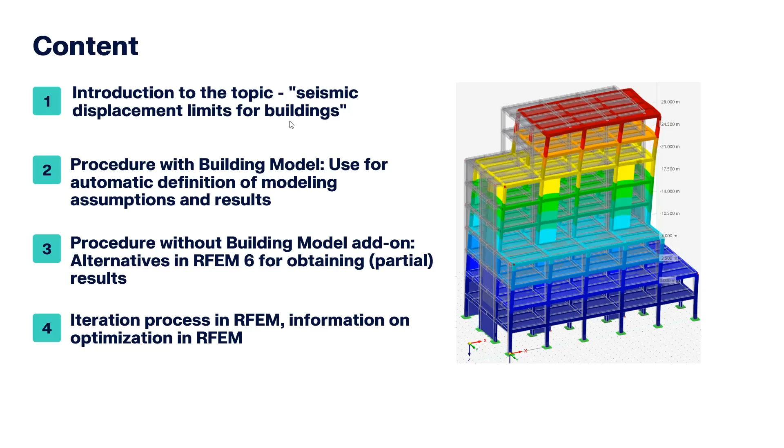Let's get started with the first topic, the introduction to seismic displacement limits for buildings. The reference for today will be Eurocode 8, design of structures for earthquake resistance. This reference applies for the whole of Europe, though in countries like Germany with small seismicity it may not be as relevant. We will make an exercise or example in which the seismic displacement is the controlling action, the seismic action.

I want to remark that I'm going to present several sections from Eurocode 8, but not all the requirements are exactly what I show here. This summary can be understood as a good pre-dimensioning tool, or a first iteration procedure, but further requirements and sections have to be complied with according to Eurocode 8. It is recommended that a full review of the norm be taken into account. As I said, this is maybe the first step for these checks.

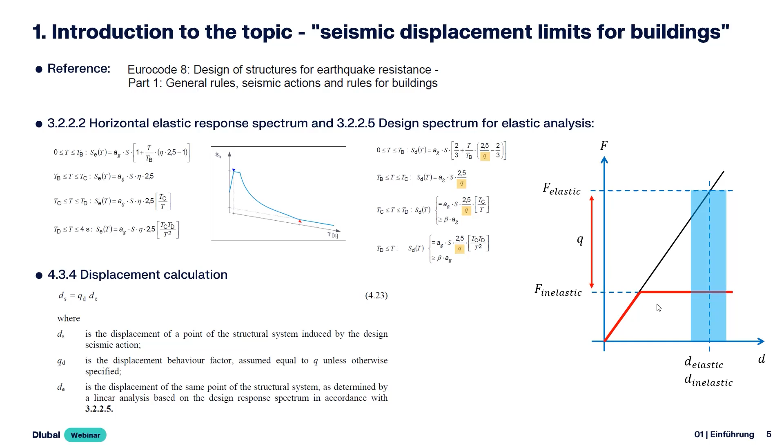Okay, now I jump to the third section here: the limits of the so-called interstory drift. So in the first place, here's a picture about what's the interstory drift. It's the relative displacement between the top of the story and the bottom of the story. So we have to control this measure of displacement in each story, and not necessarily overall in the structure.

Okay, so we have three limits, and these limits are for dimensioning and design of structural elements, but the description or classification of these three limits depends on the description of the non-structural elements. So it's very important to take into account from the beginning, in the prefeasibility or other early stages of design, it's quite important to define the description of the non-structural elements.

So if we have brittle materials, we have a certain limit, and the description of ductile non-structural elements might be really important for the construction site. Maybe the costs of these non-structural elements according to B or C might be too high, and we have to switch to approach A.

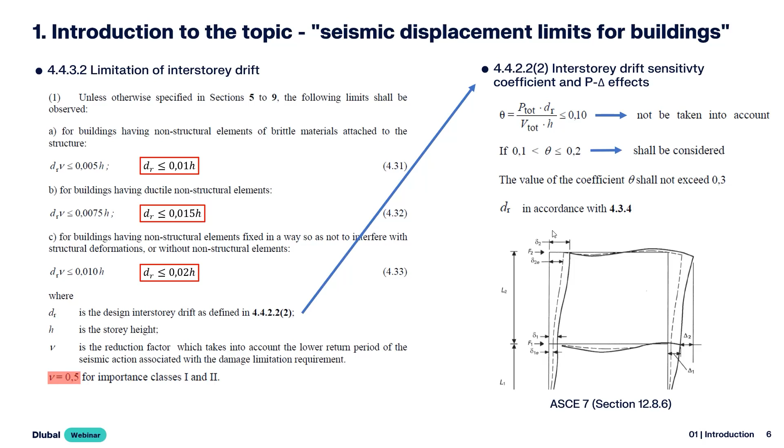So, okay, let's start on the second chapter of today: the procedure with the building model. So I have 4 steps and then a couple of sub-steps. I'm going to once again present here several sections from the norm, and after that I'm going to jump into the model.

Yeah, so let's check out two sections, two important sections. The first one, the first step, model analysis. So based on an available model, we will define a modal analysis, and after that a response spectrum analysis. But for this, we want to take into account the stiffness according to 4.3.1 and then subsection 7.

And that's why I started with this figure in the introduction. This section recommends that the stiffness when the cracking takes place should be taken into account, and this cracking takes place in the inelastic response. So if we say at the red line, it's going to be the actual response of the building. At this point we expect some reduction in stiffness, and the recommended value is half of the corresponding stiffness of the uncracked element, for both shear and flexural stiffness.

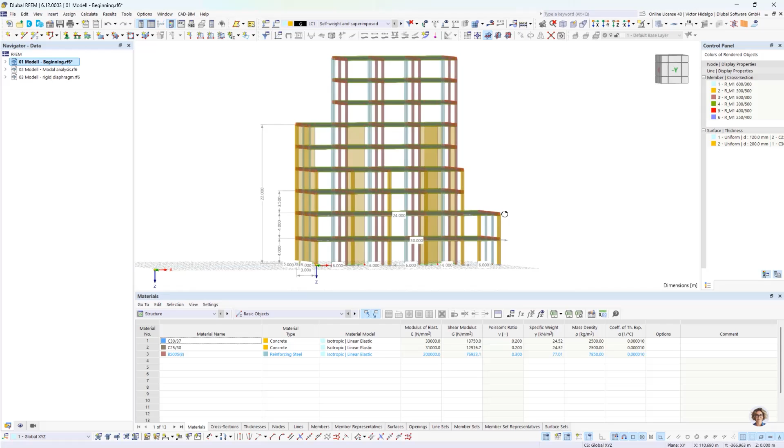I'm gonna show a very simple example in the program, and let's take a look at these two sections in the program. So I'm gonna start with a description of the building. We have a very irregular building here, with jumps in the geometry of the stories, and I did this on purpose to illustrate the concept of irregularities.

Just as a quick description, we have here a reinforced concrete building with walls, one can say very stiff walls. I'm gonna show them here with visibilities. In the navigator views, we have some predefined visibilities which help us with the inspection of the model or visualization.

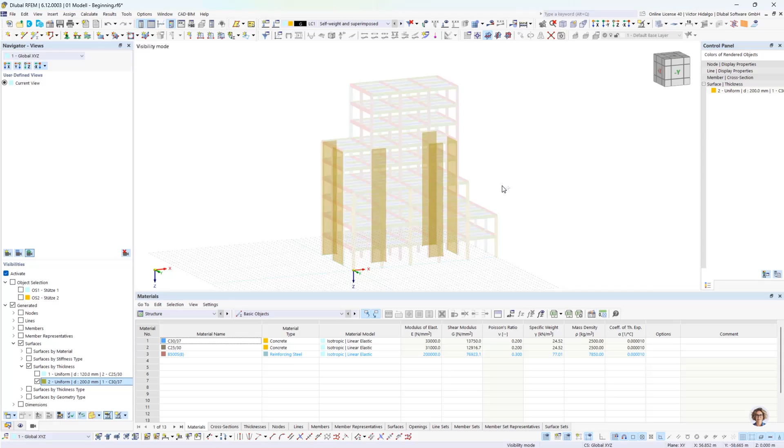So we can see here 6 walls which are conceived to limit the lateral displacement of the structure, so exactly this interstory drift.

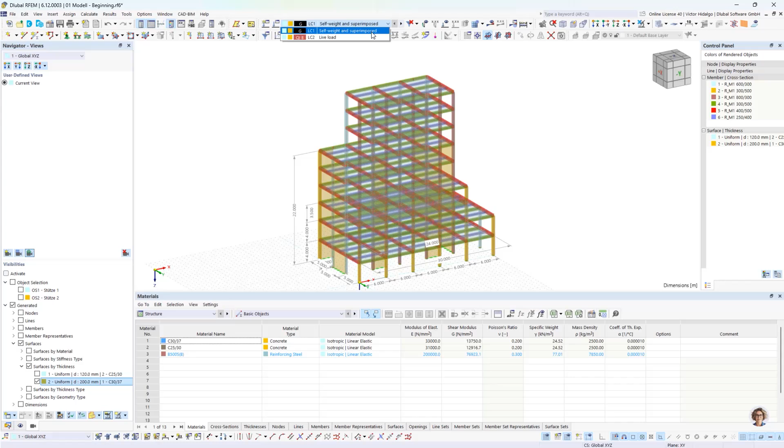Okay, I'm gonna cancel the visibility, come back to the original view, and show the loads definition. So I have 2 load cases: self-weight and superimposed live load. In this case, I have a very general definition, quite simple for today's exercise.

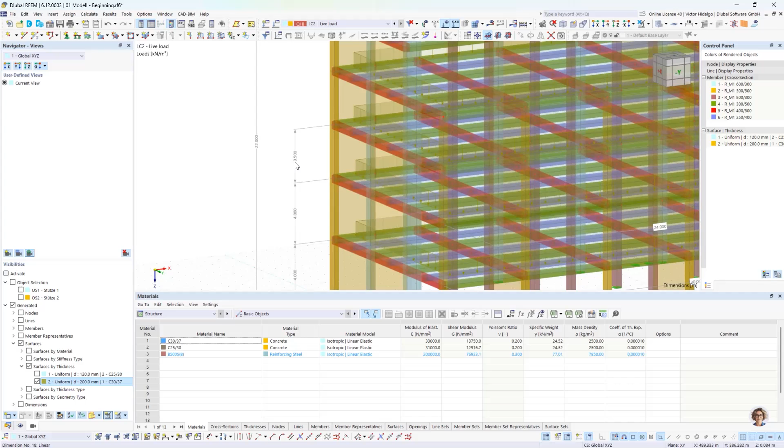Yeah, of course, so that's our base model. Also, just to say, the first 2 stories have a height of 4 meters, and after that we have 3.5. So this is gonna be important when activating the building model.

Okay, so we have this general overview, and now we want to define our modal analysis. For this, we will go to the button Edit Model Base Data, and here we can activate the desired type of analysis. In our case today, dynamic analysis. If I click on response spectrum analysis, modal analysis will be automatically activated.

And according to what I want to calculate, I can select other add-ons. In this case, it's just of interest, this dynamic analysis. Take into account that when we activate something here, we might need to provide a norm or design standard for the corresponding new feature in the program. So in this case, I'm gonna leave Eurocode.

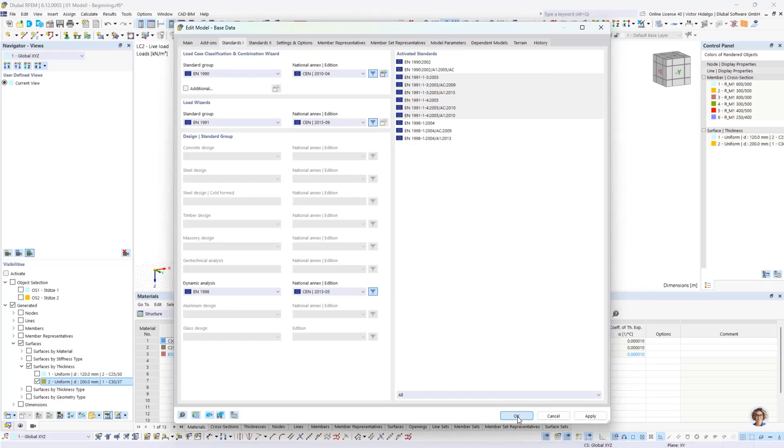Now I can go to edit active load case. In this menu, I can create a new load case of type modal analysis. So I'm gonna call it modal analysis 1, and this is gonna be basis 1.

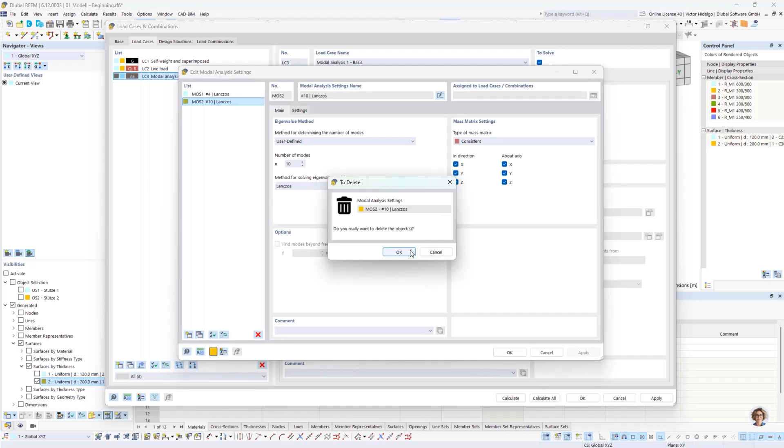I'm gonna edit the settings. I erase the second, and I'm gonna make here a typical definition for modal analysis to reach effective modal mass factors, typical value of 90%. And then we are limited to this method for solving.

On the mass matrix settings, I'm gonna choose diagonal on a classical building analysis with the 2 horizontal components and just the theta component, so the torsional component.

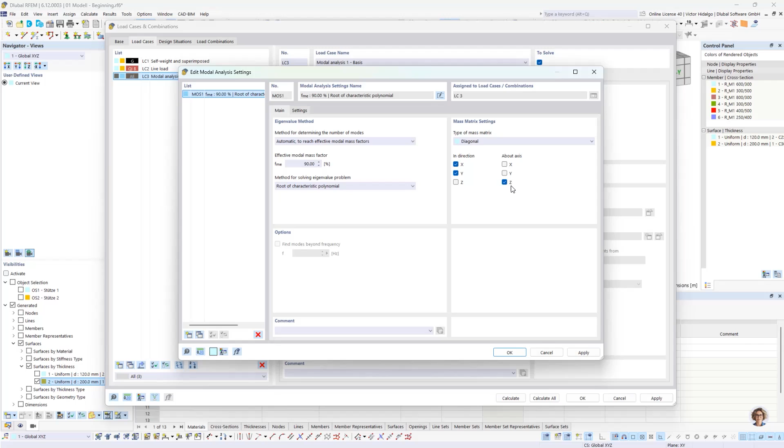Apply OK, and then we have to select a proper import masses only from load case load combination. Each code defines the kind of combination of vertical loads that has to be selected here.

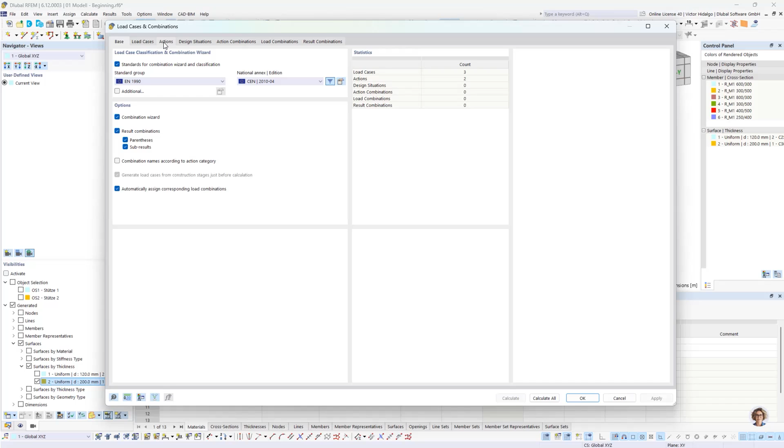I'm gonna show how to do this from scratch. So this means here in base, in the tab base, we can activate our combination wizard and/or assistant. And with this, we can automatically generate combinations according to the norm, the selected norm, in this case, Eurocode.

Okay, in design situations is the basic definition, and we select here, for example, seismic mass combination. With this, we will get subsequently here in load combination the corresponding factors and multiplication according to the desired design situation.

Here in assignment, we see a factor of 1 for self-weight and superimposed, and live load with 0.3. So that's according to the norm, that's quite useful in our program. Here we can go back to the modal analysis, be the first place, apply, and then we have available our combination. Okay, perfect.

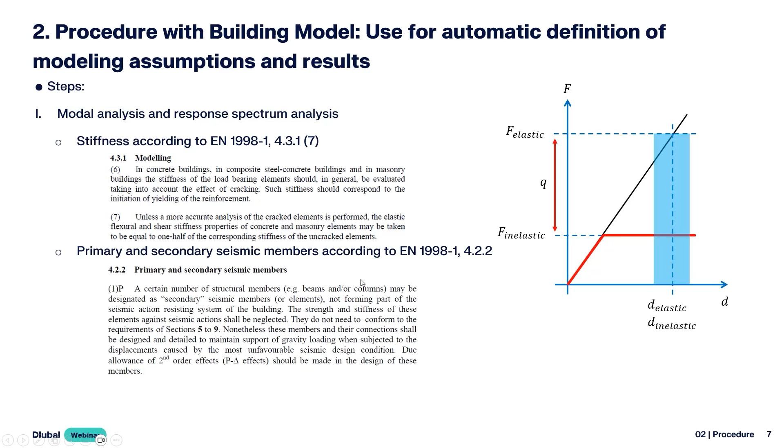So after this, I can define a second modal analysis, and we are gonna do the following thing. So this is gonna be the basis. In this case, we are not considering any of these two sections. Then we will make a second iteration with just the 4.3.1, and then a second iteration with these two sections. Yeah, okay, let's do that.

So I'm gonna copy this one. Okay, and after copying, I'm gonna change the name to 2. I erase this here, and I prepare in advance a structure modification. This is quite a very useful tool in our program, and it's very useful in this case.

So I have 2 definitions, I'm gonna show them. So here you can activate what you want to have, in this case members and surfaces. And for members, I made the following definition: according to the section in the norm, there is a reduction of 50% on the shear and bending stiffness. Okay, and I selected practically all elements.

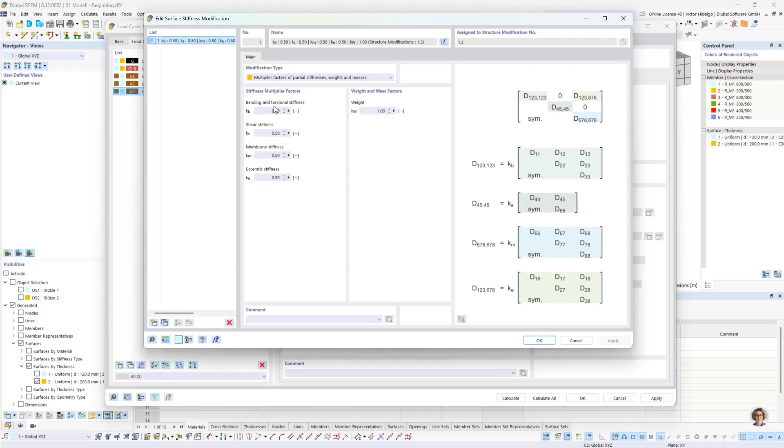I'm going to select the second structure modification. I forgot to show the surfaces definition in the first structure modification - in this case, also a 50% reduction. This stays the same in the second structure modification.

In the case of members, I have this difference. In structure modification number 2, I have a second definition - I'm only going to show this one. The first definition inside the structure modification remains the same, and in the second definition I try to take into account this section.

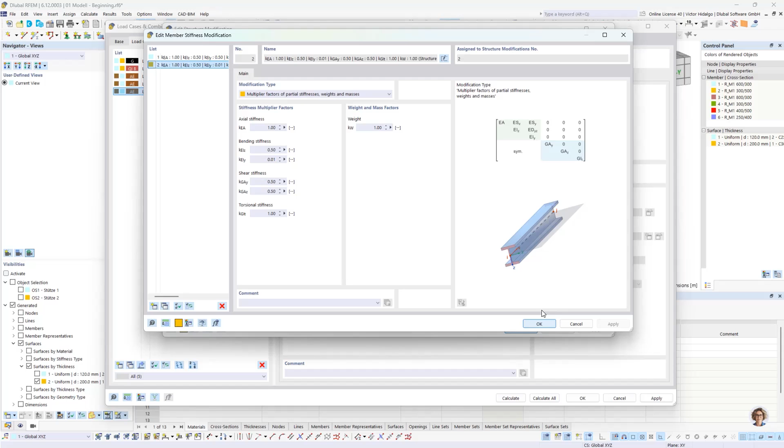What I did here is make a strong axis definition of stiffness in the members - this is the bending stiffness. I'm ignoring the bending stiffness around the weak axis for certain elements - these are what we can call secondary beams, or just vertical beams. I'm going to show in the program what's the effect of not considering these elements that do not belong to the main earthquake resisting system, or lateral force resisting system.

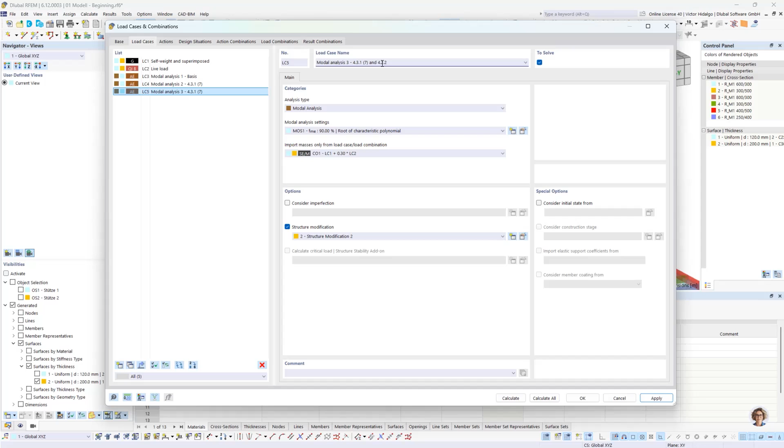And here I can write the second paragraph. So we accept this and we can run the modal analysis. It takes around 30-40 seconds for each modal analysis, so I already did it for today's presentation.

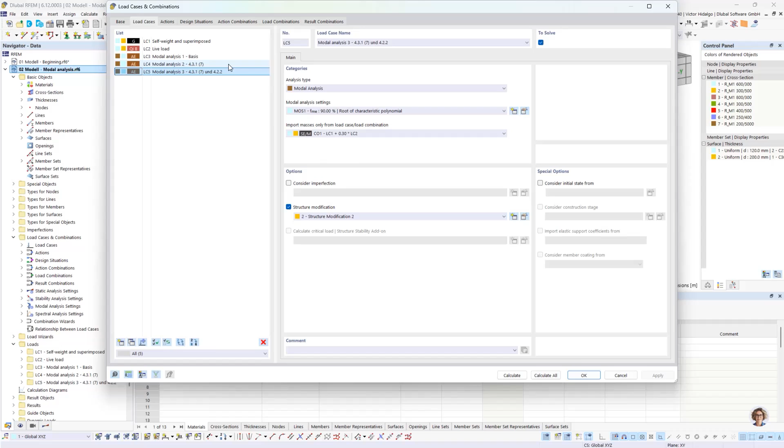I'm going to show that the definition is exactly as we did before. We're going to take a look at the modal analysis results. On the table, we can go to modal analysis, natural frequencies, and we see for our iteration number 1, a natural period of 0.92 and 0.76.

If I change to the second iteration, the stiffness reduction, we will see a huge change in the structure - from 0.92 to 1.24. It's quite a big difference, and it's very important to always keep in mind this requirement about stiffness. It's a typical or classical assumption in earthquake analysis, and here we can see how different this is, which is quite a different approach compared to designing just for vertical load - we don't normally do this for vertical load.

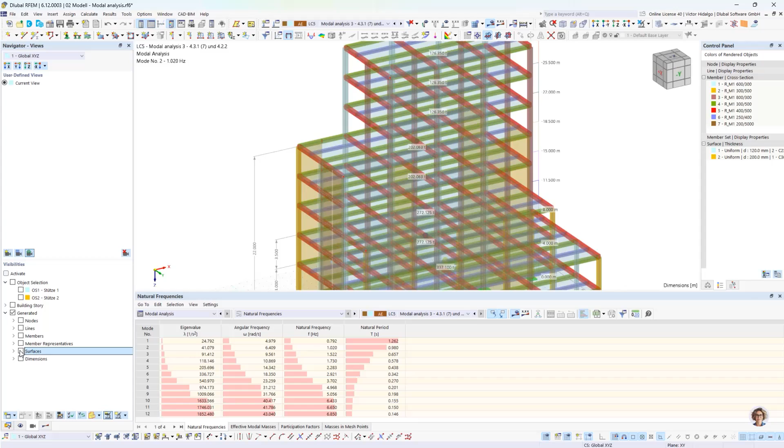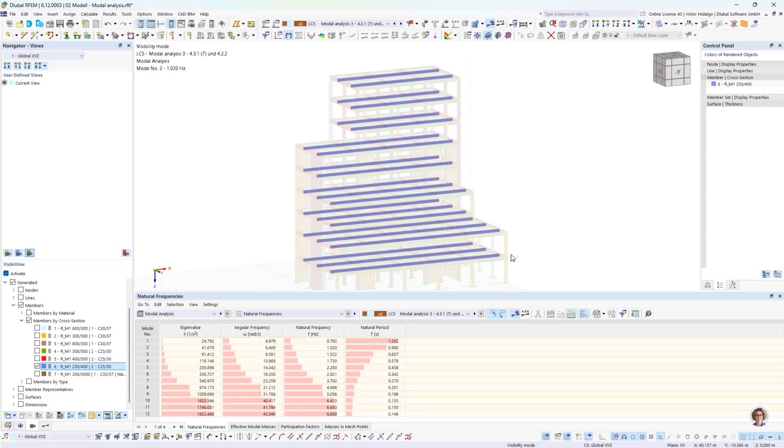Modal analysis number 3. Here we have the consideration of the secondary elements, or the non-consideration of secondary elements. In this case, we add the secondary beams - I'm going to show them here, members, cross section. I'm saying that all these secondary beams will not have flexural stiffness around the strong axis, in order to avoid their participation in the lateral stiffness, as we expect these contributions shouldn't be that big.

They do not connect to any column - we don't have any frame system there. We can see that the result remains almost the same, just a small change in decimal places.

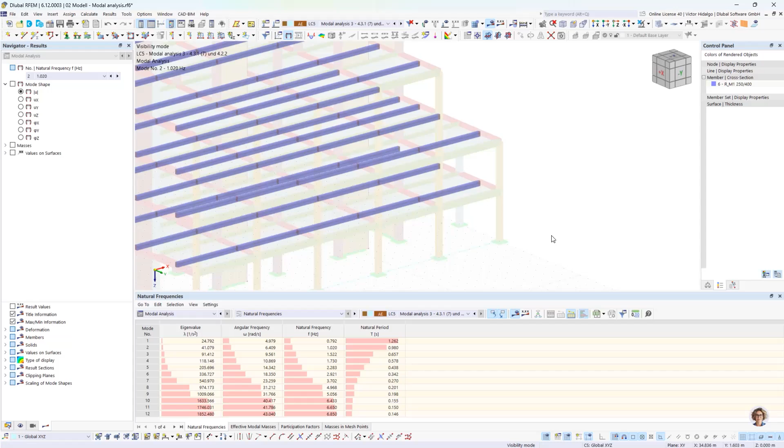After this, I'm going to work with load case 5 - this is going to be our reference. Just to show you how you can inspect modal analysis results, here's a quite important table: effective modal masses. You can see, for example, if you want to display the deformed shape of a particular mode, you can select what you want to display in this drop-down menu. Also important is the factor for effective modal mass here.

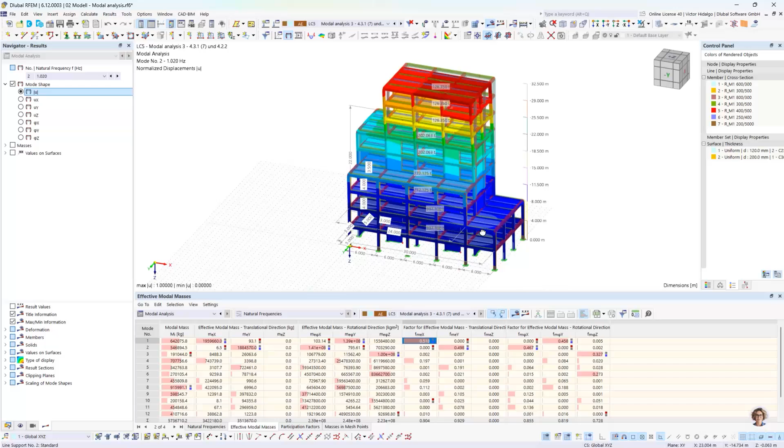I selected this geometry to show a very particular effect when we have irregularities and also have a very stiff element such as shear walls combined with frames. This interaction plus the irregularities creates a particular condition where the fundamental mode has a participation of around 50%, which is relatively low - we're used to seeing maybe 70 or 80%. With particular conditions in geometry, we can see that the second order modes are quite important in the response of our building.

Just wanted to show this. Now I want to define a response spectrum according to the content in the presentation. After doing this modal analysis and this stiffness and primary and secondary definition, we can make the definition of the horizontal elastic response spectrum and design spectrum.

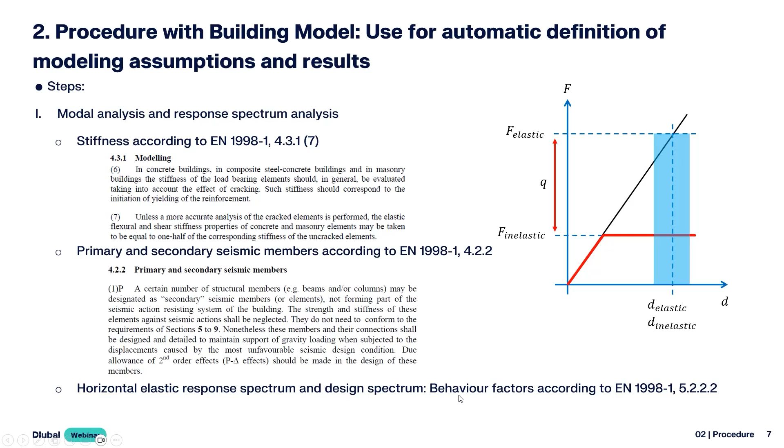Here it's important to make a definition of the behavior factor. The behavior factor is defined or specified in section 5.2.2.2, so I recommend a full review of this section. In this case, for our concrete structure, I made a definition - how this works is that according to the location and the norm, for a particular country, it is defined which ductility class or kind of requirements I have to fulfill for this particular place.

For example, in Italy, with high seismicity, I have to select a structure that fulfills particular requirements - this is provided by the norm. Because of time, I cannot make a full explanation on this, but let's assume that according to the location of this building, I have to use ductility of middle class type. Based on the description of our system, we have a dual system, coupled wall system, and this is the base definition for our behavior factor.

As we see here in the title, it's for systems that are regular in elevation. So I can calculate the first or basic value of the behavior factor, and after that I have to check for irregularities. In this case, the building is irregular.

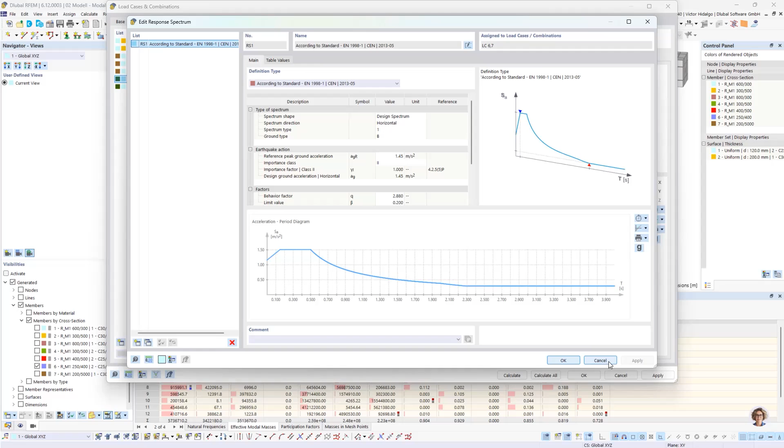I just say okay, and okay, I'm done with this definition. Important here also is to create a second response spectrum, and as we saw, if we use a response spectrum of type design spectrum, we have to multiply the results for displacement. In this case I'm gonna do this in a particular way here, but there are many ways of doing this.

What I'm gonna do is create a second analysis and say, okay, if I multiply again by a behavior factor Q, then I get this. I'm gonna use here this scale factor definition. So if I multiply again by the behavior factor, I'm gonna get the correct results for displacement.

Okay, I accept this, and now I can run my response spectrum analysis. I'm gonna jump into the presentation once again. Now we can make the activation of the building model add-on.

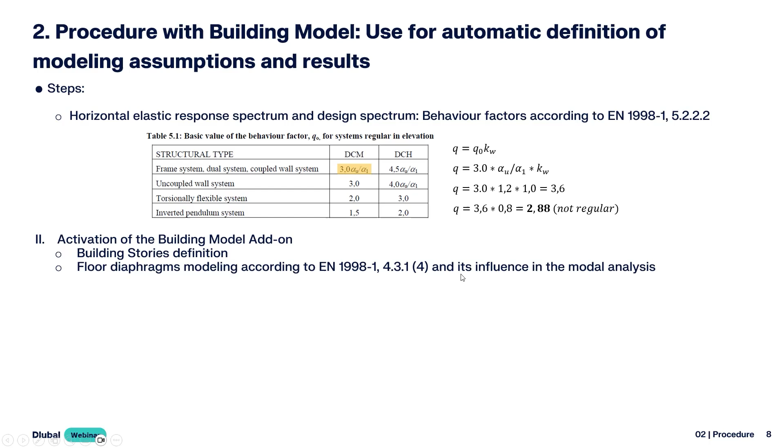Before running our response spectrum analysis, I'm gonna make the building stories definition and the floor diaphragms modeling according to section 4.3.1, and I want to show the influence of this in the modal analysis. This floor diaphragm modeling makes reference to a very famous assumption in seismic design or seismic analysis, the so-called rigid diaphragms.

I want to say that it is not a better or worse definition - it's difficult to make a general rule whether we have to use this in our case or not. There is a physical condition or clear rule where this assumption can be implemented in the model, but as a general matter, this is a very engineering concept and interpretation, whether we are allowed to use this or whether we should use it.

I just make reference, but if you are in a case in which you might want to implement this, my recommendation is to run a couple of iterations, as I'm gonna do right now, and try to have a feeling about the results and make an interpretation of whether it is appropriate to consider this or not, or what are the effects of this beyond what's typical to do. So let's do it.

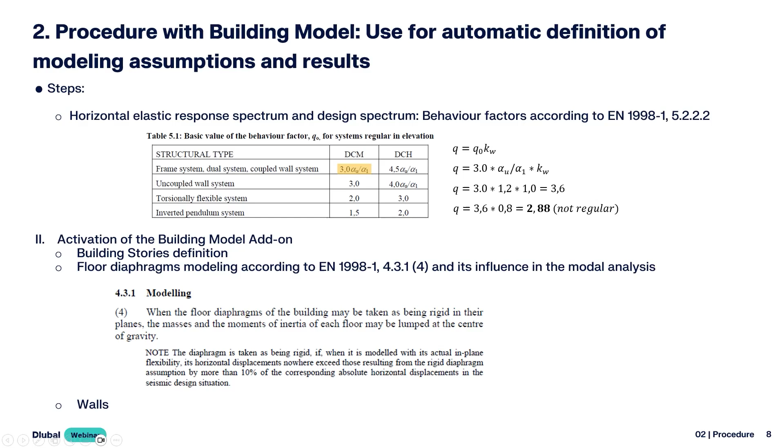And also here in the activation of the building model add-on, we can define walls. I'm gonna activate this - once again here, edit model base data. And okay, there was already a definition.

Okay, so building model. When I activate this, I get here this object or folder, and I can edit the definition.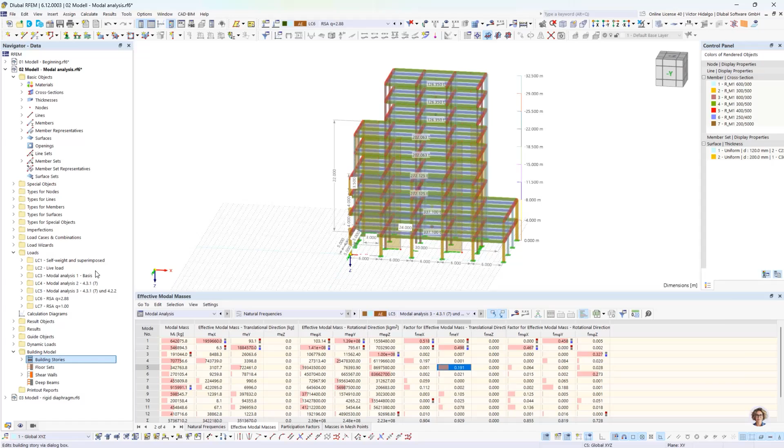I had here a predefinition with two different stories, but I'm going to erase this to display how it works. So I erase the building model, and I'm going to generate building stories from scratch. Then I go to edit, and the program automatically recognizes the different floors, or the planes of the horizontal element. With this automatic definition, we can save time defining the stories, and it's quite useful to have this menu.

Now we can make global adjustments. In this case, I'm going to leave this as it is. For floor diaphragms, I'm going to consider no assumption in the stiffness, so I'll leave original stiffness. I have a second model with the rigid diaphragm, and we can see a basic difference between these two approaches.

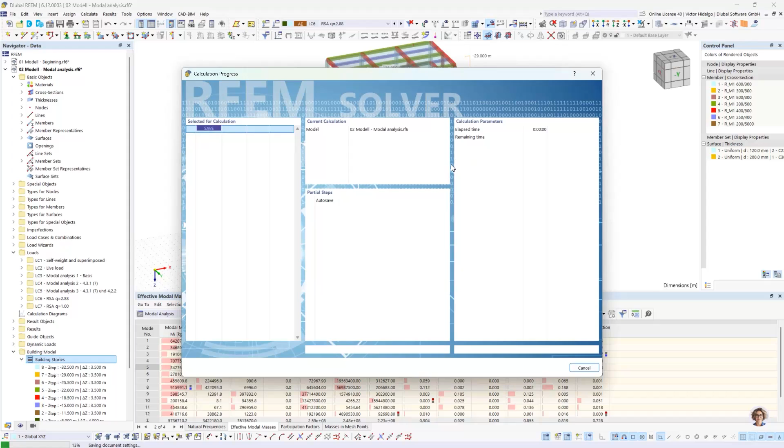Okay, I'm going to leave that and run this response spectrum analysis. It takes not that much time since the modal analysis is already available. Here we can see the progress bar and an estimation of remaining time.

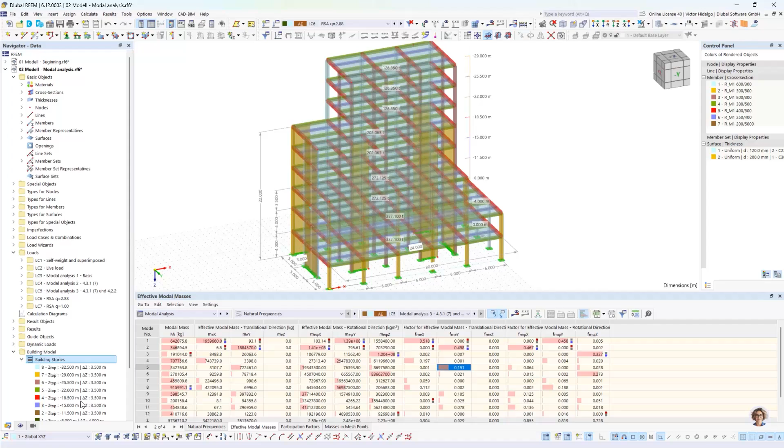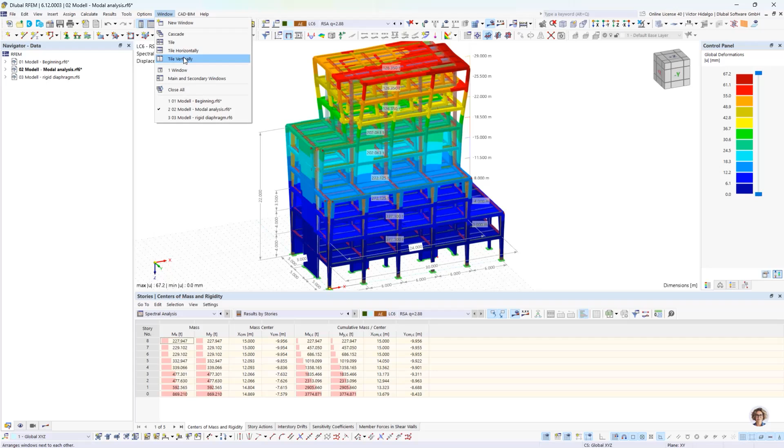Okay, so here I have the same model so far, but with a model definition of rigid diaphragm. I want to show this for comparison purposes, so I'm going to use Window, Tile Vertically, and then close our first model.

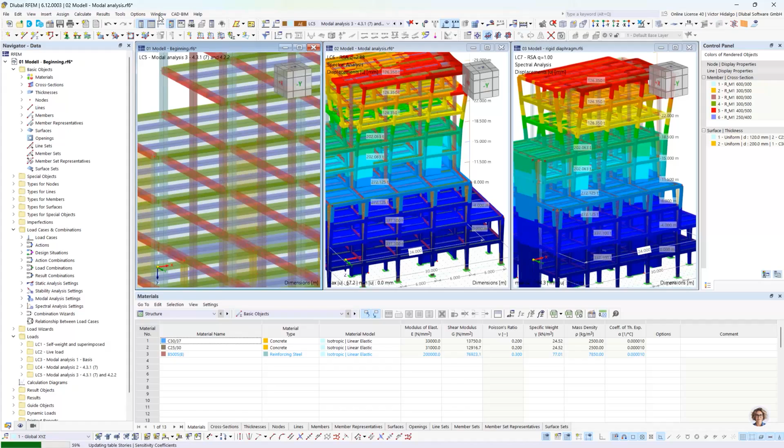Okay, and then once again I'm going to go here, just takes some time. Window, Tile Vertically. So we have on the left the results for the model without rigid diaphragm. I want to display the results for modal analysis, and in this case I'm going to use this result for masses.

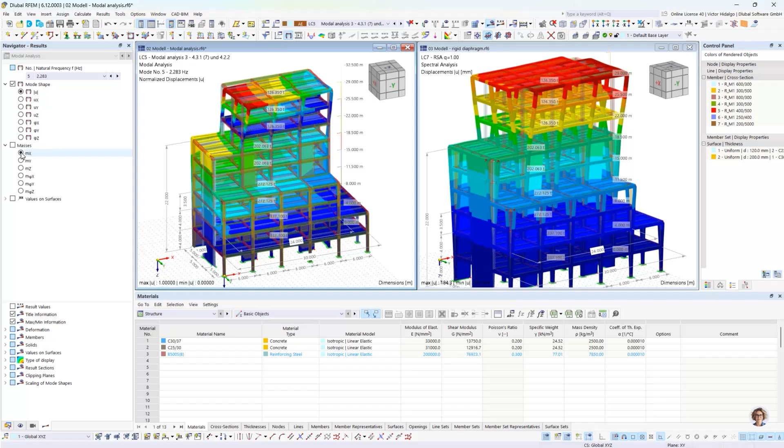What we see here is that according to the mesh settings on the program, with this basic definition we have a mass definition on each point of this mesh. So this is quite a complex mass matrix definition. If we activate the option of rigid diaphragm, I'll show here, we get a much more simplified description of the mass matrix.

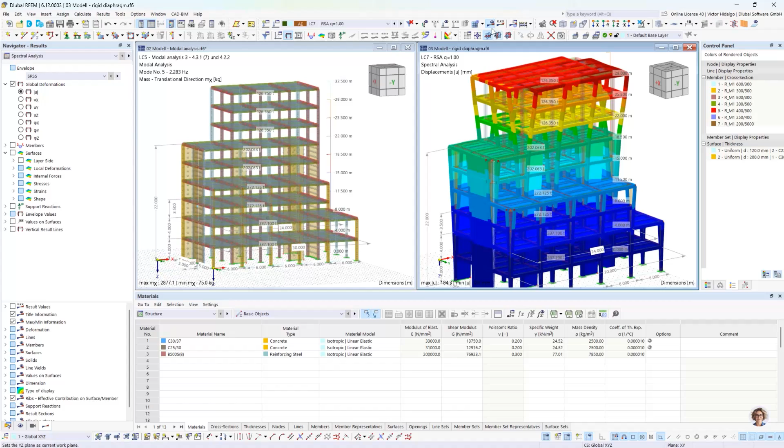So in the first place I want to show you the definition in the building model add-on. In this case I have the same definition, but I selected all stories and selected the rigid diaphragm, floor diaphragm as rigid.

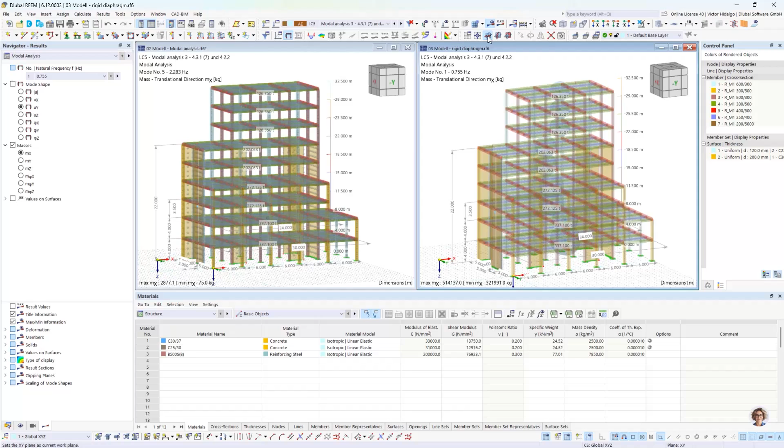I already ran the analysis just to save time, and in the same way I'm going to look for the results of the modal analysis, iteration number 3. Once again the masses definition, and we see a huge difference. Now in this case we have what we call lumped mass definition on the center of the element, or of the floor. This helps a lot with the analysis time for this model.

Okay, once again it's important to keep in mind that this has to be analyzed, whether it's better the option on the right or on the left. There is no general rule for this.

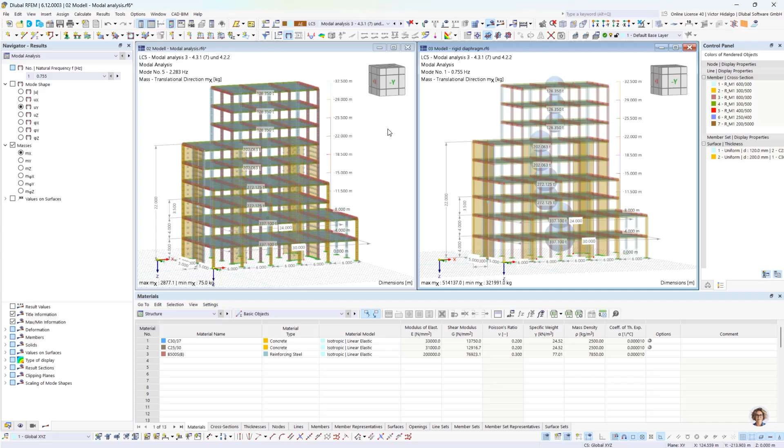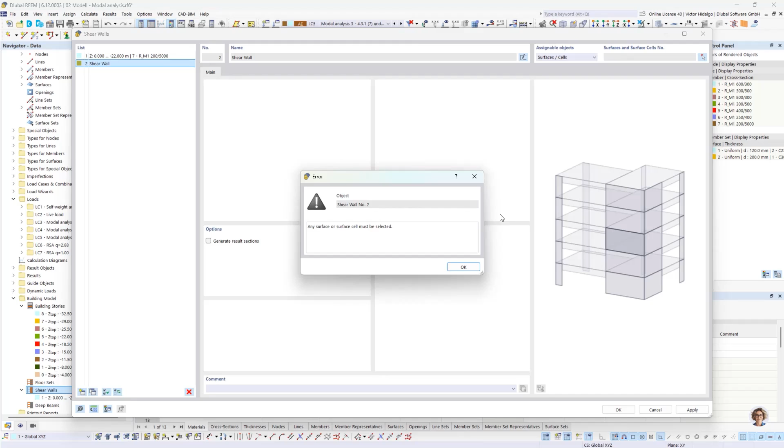Okay, I'm going to jump on the model on the left and show something: the walls definition. I'm going to make a new shear wall definition. There is already one, and this is quite versatile because I only have to select the surfaces and the program recognizes the geometry of the wall. So I select this wall, simply all the surfaces, and the program recognizes the cross-section dimensions.

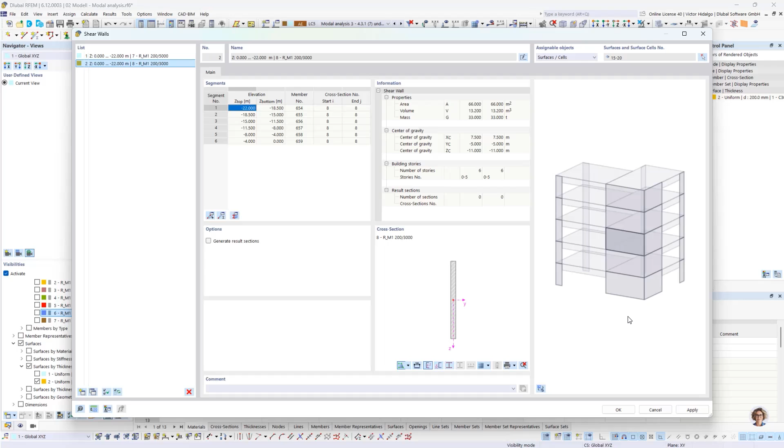And also the floors definition, and with this I can integrate the results for the areas, because for design we need the results in the form of a member. Exactly, so this is quite versatile and useful for a quick definition. I have to delete results after creating a wall, and we see here an internal element that integrates the results for all these areas.

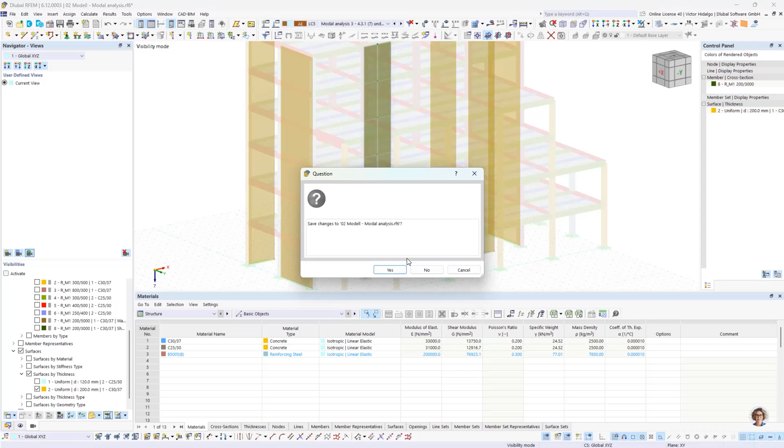Okay, at this point I'm going to close this model and stay in the rigid diaphragm model for the last part of this section. I come back here. We activated our building model add-on, and now we have to check the requirements for the limitation of interstory drift. According to the floor definition, I made here the multiplication, and our limit is going to be 35 millimeters.

I'm going to select brittle materials for non-structural elements, and in the first place I have to check the requirement of P-delta effects. Okay, and finally we can deliver the results for design.

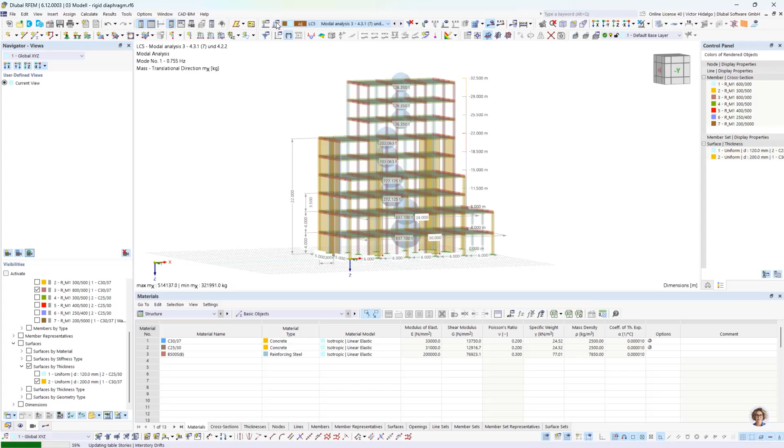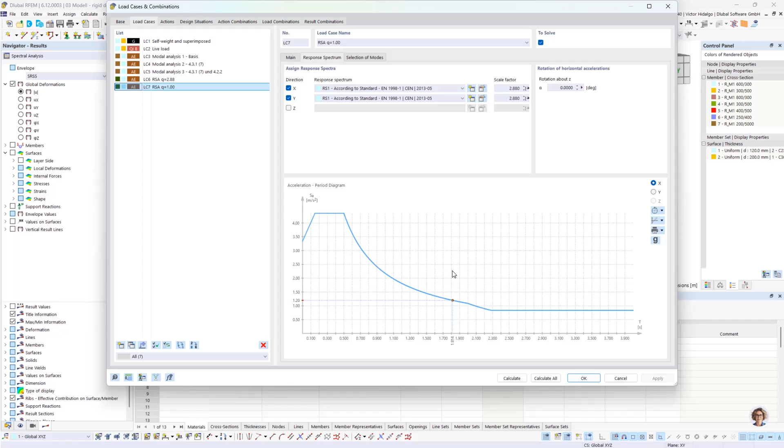So here, important: if we are going to check displacement results, remember we have to use the multiplied displacement from the response spectrum. In this case, once again, I have to use the response spectrum analysis definition with the scale factor, quite important since the beginning of today's presentation. Okay, I'm going to run this analysis.

So, okay, it's already there, the analysis, and in this case, with the spectral analysis and the building model, we have an additional table of results, and this is what we are going to inspect right now.

This is the entry results by stories. In results by story, we have this group of tables with quite important quantities of centers of mass and rigidity. The calculation of center of rigidity is particular - we have to take into account the shear walls and the particular stiffness of each column. So this is a very good result or summary for our structure.

In story actions, we have the summary of story forces, its delta, and the location of resultant story forces. So for checks of stiffness irregularity, if it's required, this table provides the base information for it.

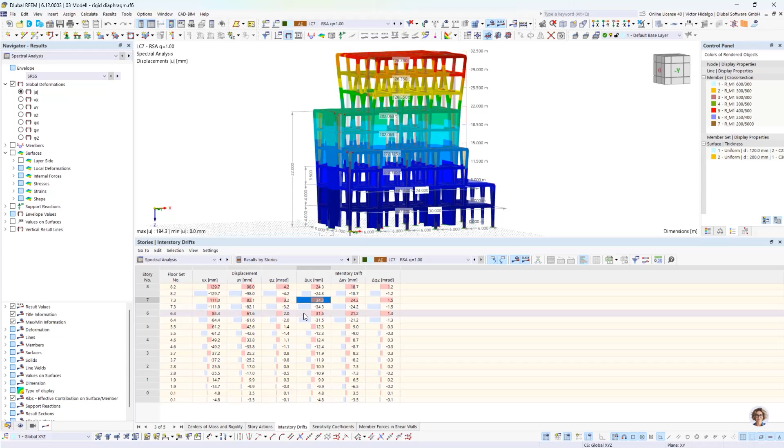So I made several iterations to, in the cheapest way or with the smaller sections, achieve this value. So of course, this is the objective of the design now, the most economical way to fulfill the requirement.

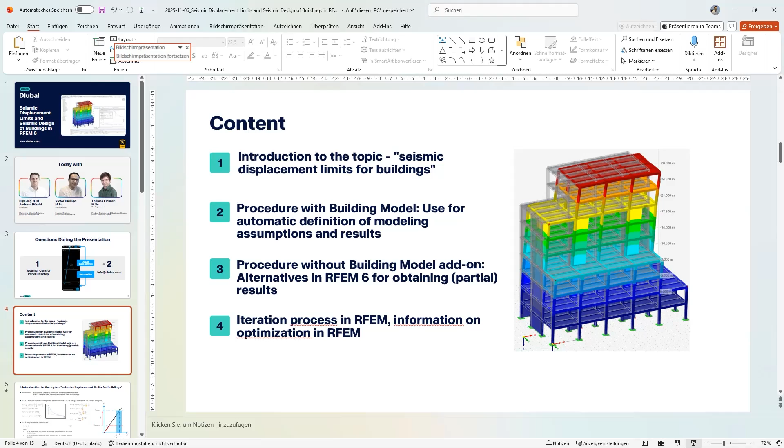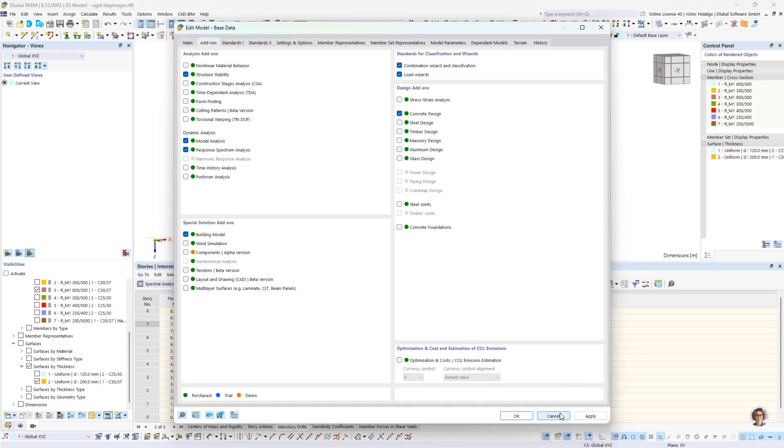So this part is done, and after this we can see how we provide the design add-ons with the information for design. In this case, I already did it, so we can activate the concrete design add-on, and in accordance to this, we can create additional design situations - in this case seismic, or in this case permanent and transient.

Important is that when we have seismic and we want to consider response spectrum results or response spectrum analysis results, we have to use a result combination. Otherwise, we cannot consider these results. So in result combination, we get 2 because we have 2 response spectrum analyses.

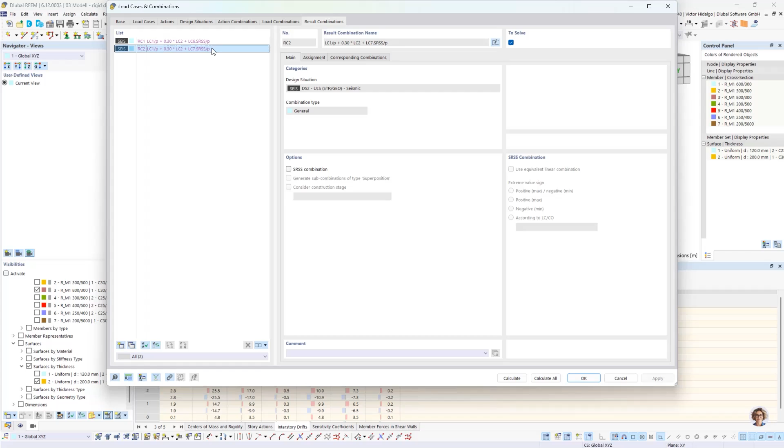And after this, I can go to the table design or concrete design and make the definition. I'm going to make here input data, so we can select what we want to do.

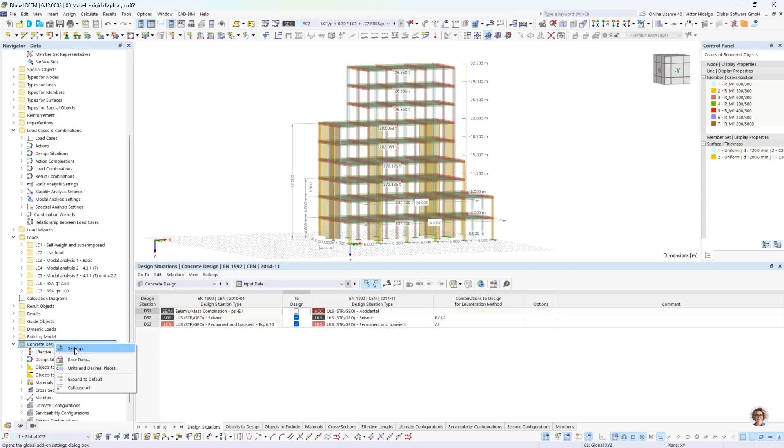Here, very important - we have separate webinars for this, but here I just want to mention that in concrete design add-on settings, you select the seismic configuration. This is not available by default, okay? And as I said, you can make a complete definition here.

In this case, I can check the results in general. So in this case, there are some seismicity checks that are not considered, that are not fulfilled, and I just want to say that in the input data and design situations, I selected the result combination 1 and 2, but the second is considering the multiplied response spectrum. In this case, I made this on purpose because this cannot be used for design.

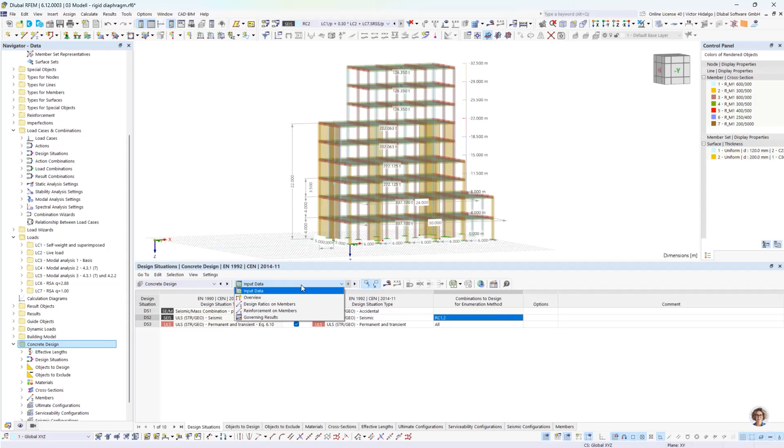In this case, the definition should be like this - we have to ignore this, this is just for displacement. And this is the reason why we have some design ratios that are bigger than 1.

Okay, very quickly, I'm going to show now what we can do here in the next chapter, and this is quite summarized. So procedure without building model add-on. We can do very few things without the building model add-on - the first part we can do, but basically all the features that we saw here, we cannot do.

This means that we have to do a very manual procedure, so for example exporting to Excel and then making calculation by hand - I mean in a software, but manually making all the definitions. So the only quantity that can be generated without the building model add-on are the story forces.

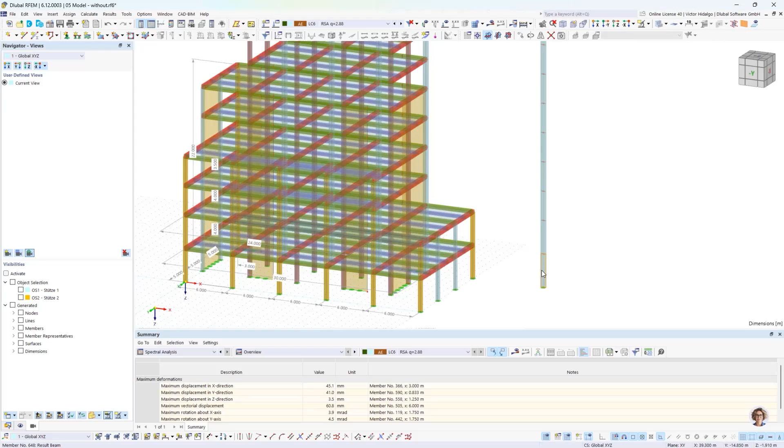And for this you have to make the following - I created a result beam. This result beam has no influence on the stiffness of the building or of the structure, so it's going to be ignored, and it works as an integration element.

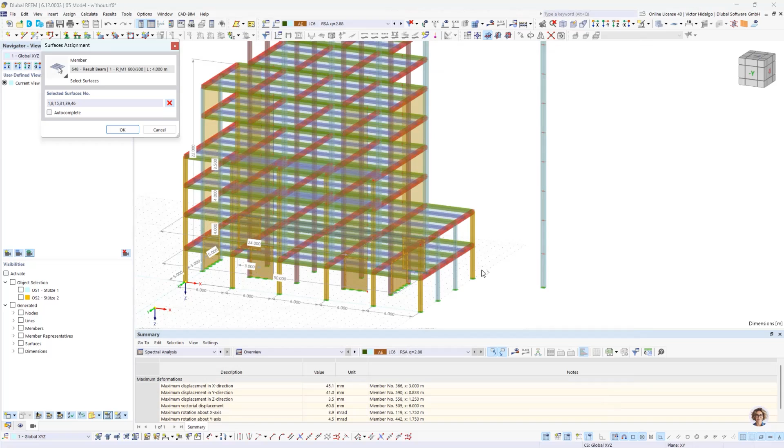So I selected here integrate stresses and forces from listed objects, and on each floor I selected the walls - in the first floor, all the walls for the first floor - and then all members, or in this case all columns for the first floor.

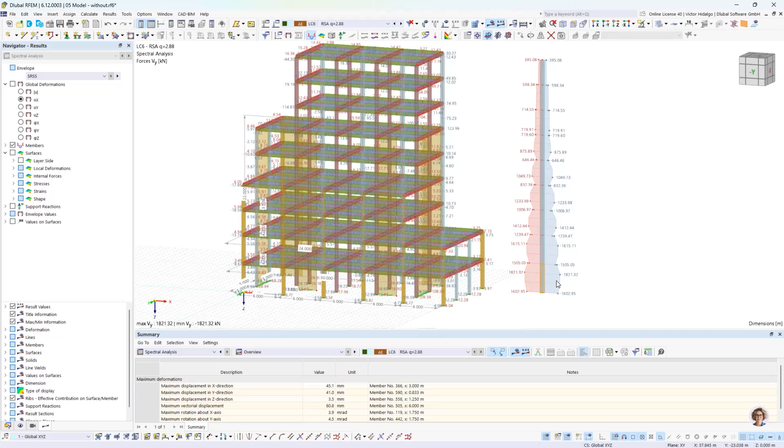And by doing this I can integrate the results on each floor, for each result member. I'm going to isolate this just to have a clearer view. What we see is that here in the first floor we can recreate the 1602. This is bottom, and then top is the 1505. It's the same result. So if I change the internal forces direction and the other direction, I get exactly the same values.

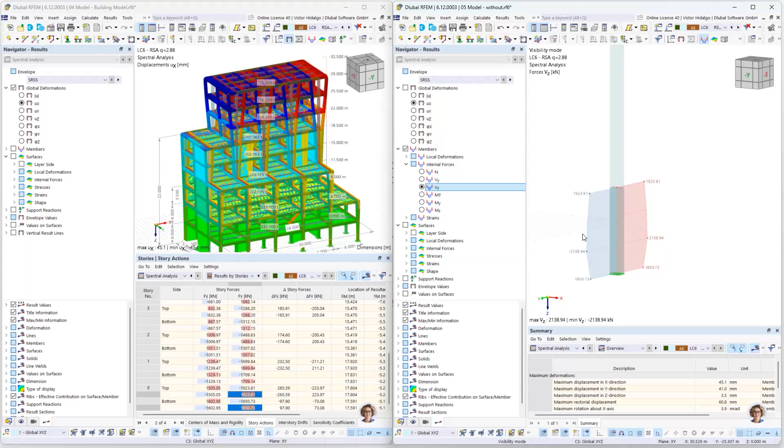So I say this is the only result that we can reproduce. As a summary, all these other values we cannot automatically get from RFEM. So we either have to export to table and make a manual definition of it. That's why the building model add-on is quite useful.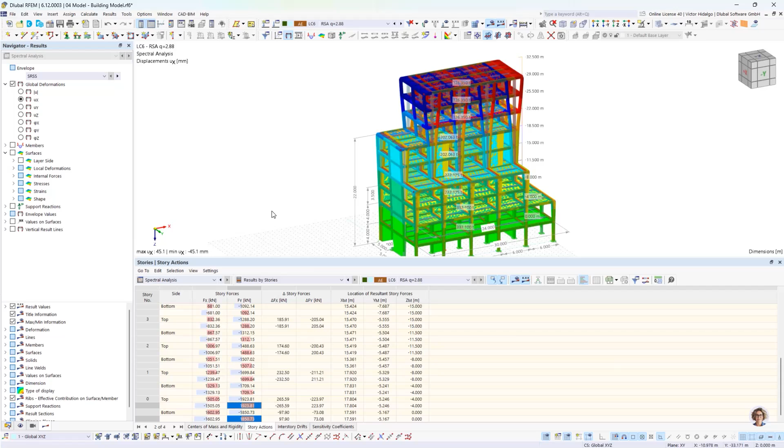And well, design can we do as I previously showed. Let's use here the final remark.

And as a general conclusion, our hint for the optimization process and iteration process: I always mention that for the modal analysis, we have to make maybe 1, 2, or 3 iterations to have a sense of results, also integrated with the assumption in the building model add-on.

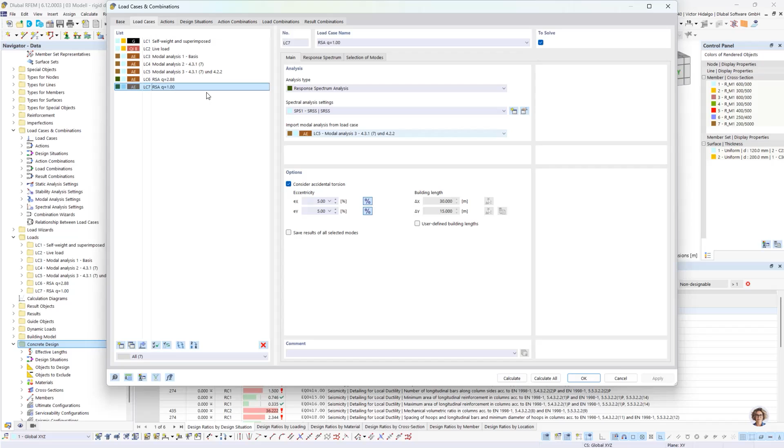Also, for example, the two results for the response spectrum, as we have an example here. After this we have to make a design, and if we do not fulfill something here, we have to go back to change probably dimensions in the elements and carry out the whole design again. If I make a change in the dimension of this column, then I have to go back and run again the modal analysis and the response spectrum analysis, and perform once again the design.

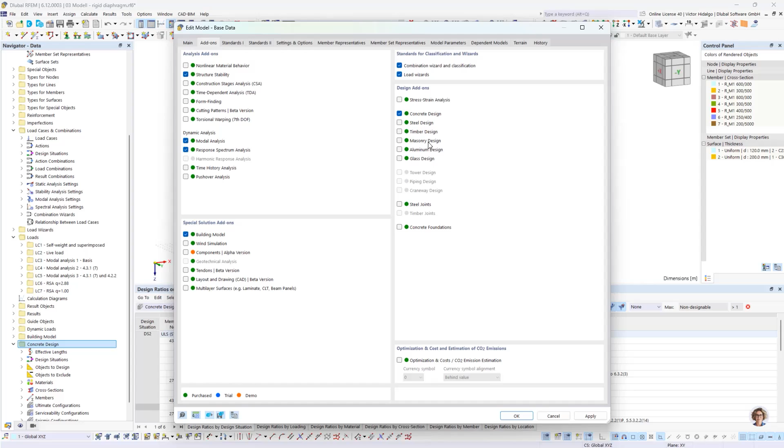So for this iteration process, very intrinsic from seismic design and seismic analysis given the condition of this iterative process, our program offers a very versatile and useful approach with our design add-ons. Our philosophy is all-in-one: you can apply by activating and selecting what you need. In this case, we made use of 4 add-ons, and you don't need an additional application for this. That's why RFEM is very useful for this. That's the final conclusion on this topic.

Drift limits, or interstory drift limits. So in this case, I give back to Andreas, and thank you for your attention. Andreas, you can take the presentation or retake the presentation.

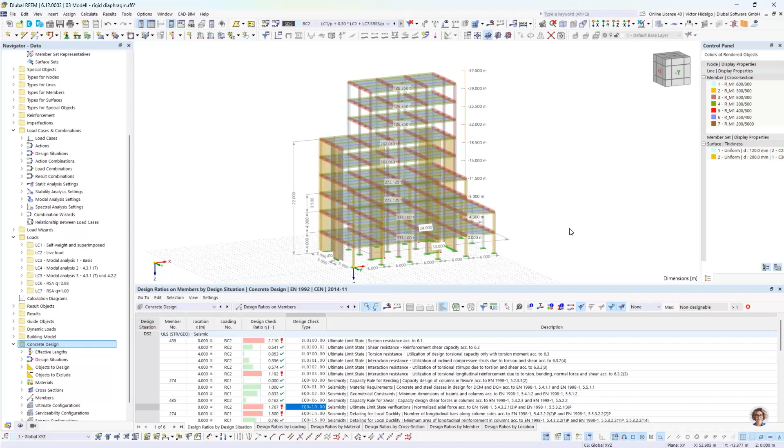Thank you, Victor, for your nice presentation. At the end, I have an additional hint for you about our online courses.